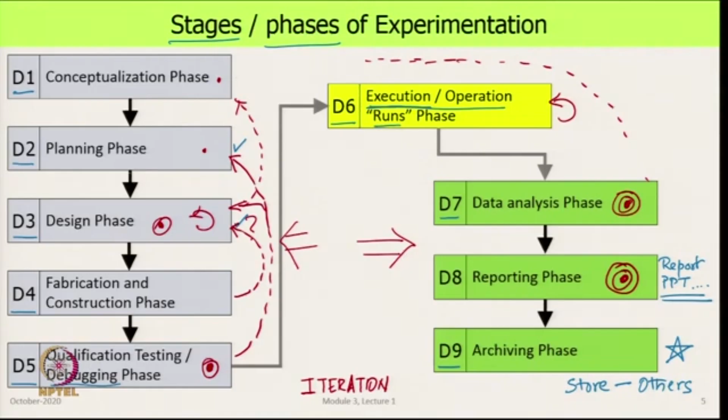So those were 2 examples of the process of experimentation. All of this takes a considerable amount of time for discussion. So in this lecture we will look at D1, D2, D3 phases, and then in the next lecture we will look at the rest of them.

We start with the conceptualization phase, and here what we essentially have done is that we sit in a team, have a lot of discussions, brainstorming, look at available information, ask the question: well, what is it that we are actually wanting? So we are posing the question, and this could take different forms.

It could end up being a question on a test of hypothesis, that is one. Or it could just be that I need some data, or we have some data and we want to check the goodness of that data, or we want to build up on that data. So that is checking of existing data, or we want to validate a design or a process, or maybe we had a theoretical design and now we want to do an experiment to validate how good that theoretical calculation was. These are some of the possible options, and you can add more to this as to what form the question or what we may call the objective may take.

We are not going too much into detailed numbers at this point, but asking very broad questions based on what is it that we want this for. Rather, we are asking, why am I doing this whole thing in the first place? That is the question.

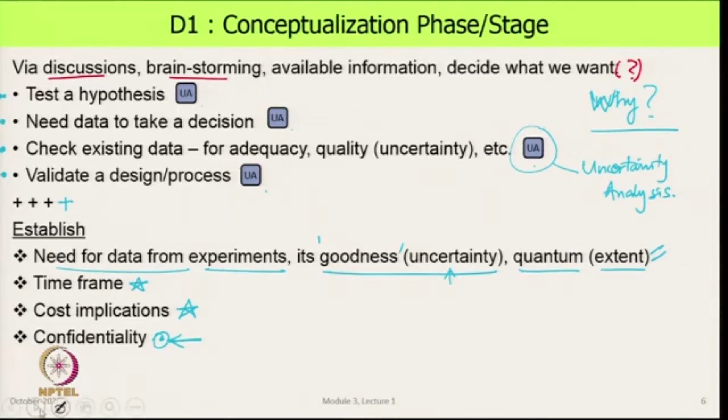That done, we come to the next phase, which is the D2 phase, the planning phase. And here is a diagram which captures some of the issues that I mentioned in those 2 examples. So we will go over this now.

We start at the top, where we say that I want to test a hypothesis, or draw conclusions, for which I need data, and I need to perform an experiment. So this is what came out of the D1 phase.

Now how do I proceed? We have 3 options here. We can either go to another laboratory or make the setup in our own laboratory, and we may have other constraints, whether we need a particular setup at all, or we can make any setup from a blue sky design.

So 2 things happen here. If you have to go to another laboratory, like in that first example, we have 2 possibilities: the answer could be yes or no. If yes, we ask can I use the setup as it is? If it's a standard setup as per the standard, we say yes, go ahead straight to debugging, make the test plan, send the sample, make the payment and execute. So we skip some of these stages.

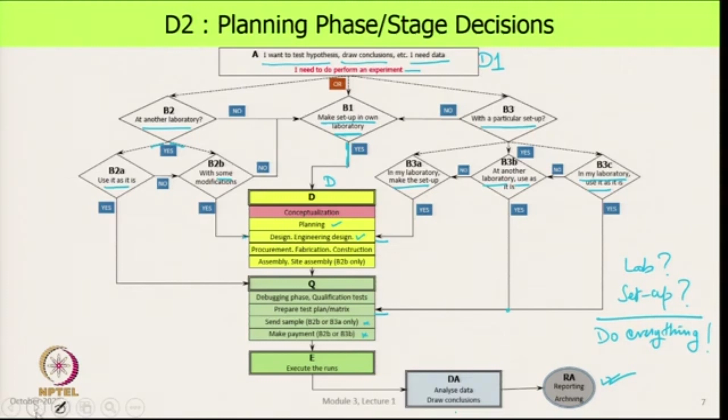And if we have to make it ourselves, then we come to the concept design part of the planning phase, which is basically like a typical design process.

By design, we mean industrial design in that sense, not designing by solving equations. So what we do is list the requirement criteria for the experiment, which is what data we need and its uncertainty.

And we ask: what are the concepts on which I can make this?

To give an example, we were looking at the issue of thermal conductivity of a material. There are many possible designs. One could be steady state, another transient, one could require a very thin sheet, another a thicker mat, one could be cylindrical, and different types of parameters could be measured in any of these experiments. So just thermal conductivity itself gives us lots of possibilities to actually get to the answer that we want.

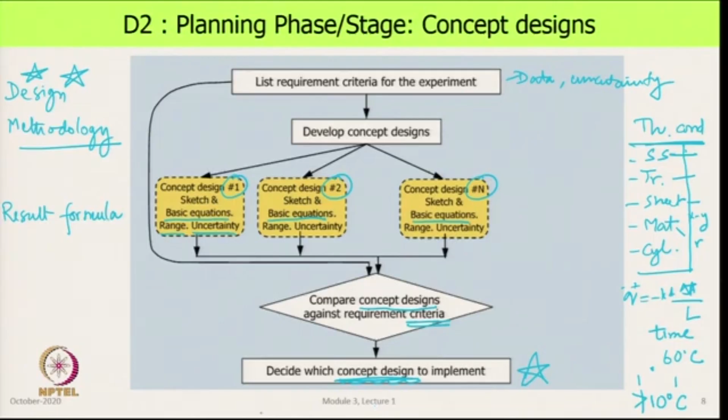So at the end of the planning phase, we have with us a physical basis of what to design - a concept design we have. This also gave us the physical basis, the result formula, and what measurements we will take in the experiment. It gave us some idea of the setup, apparatus and equipment, and some idea of the uncertainties we can expect. It also gives an idea of where we are going to set up the experiment.

That also we have decided in this phase - do we have the space? Which setup will we use if there is already something available, and how we are going to integrate it into the design? The need to design a setup also gets decided at this point, along with why and how to make it.

This means that we have to take a decision on hardware, both the non-electrical and electrical hardware, and also all the software requirements. So we get an idea that this is the thing I have to do. We are not sitting to solve it at this point, not writing any code or buying anything, but we are thinking through what all I have to do. That is what we are doing here. And in these cases, we have some idea of using uncertainty analysis.

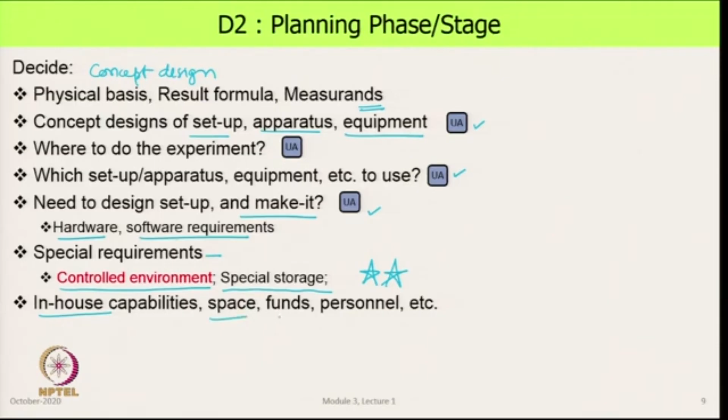At this stage, once we've done this, we also ask, what are my in-house capabilities? What can I do, what can others do for me? Space requirements, funds, people, all of that also got quantified. So it gave us a lot of clarity on how we are going to go forward and with what constraints.

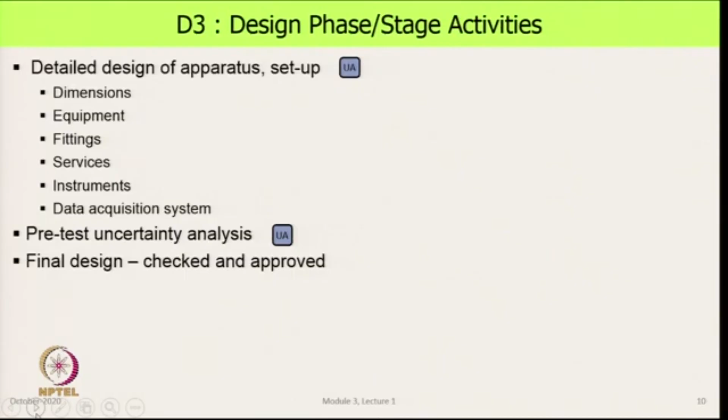That is the outcome of the D2 planning phase, which leads us into the detailed design phase, the design engineering phase. So in this sense, what was designed there is now detailed engineering design.

And now we are actually sitting with that formula equation that we had. We got a lot more knowledge about the practical part of it. We are going about designing everything, which includes its dimensions, what equipment we are going to have, what fittings, what services like compressed air or cooling water we may need, instruments that we will put, and what sort of data acquisition system we will have, and whatever else we need to do.

All of this, we could make a model, entirely possible, but by and large this is a paper pencil or a computer design. We have a lot of software where you can completely design it in full detail down to the last millimeter, see how they assemble, how they would disassemble, what can fit, what cannot fit, everything is done.

So it gives us all these things get decided, and we also do a very important thing, which is pre-test uncertainty analysis. We now have an idea of what instruments we are going to be using, what are the dimensions of various things, and the data acquisition information we have. We can use this with the result formula that is already there with us, and see what the uncertainty will be if we go ahead with this design.

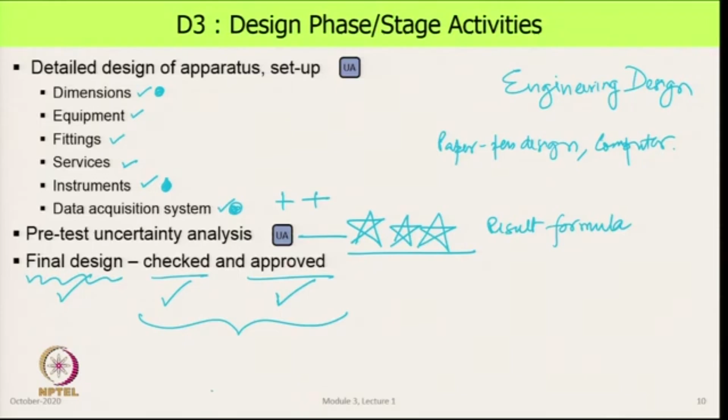If it is acceptable, we see, well, can I reduce the cost? If it is not acceptable, we say, what of these things can I change so that my expected uncertainty is within what I want. So that is quite a bit of effort, and after doing all of that, we have a final design which has been checked by somebody else and approved by somebody else. Professional engineering, this is always done, and it is a good practice, because someone who designed it, after a while the mind becomes a bit saturated, we can't catch our own mistakes. Somebody else looks at it, says everything is okay, says fine, go ahead, make it. Then we are doubly sure that the probability of making a big mistake or something going very seriously wrong is considerably minimized.

So these are the activities in the design phase. We do detailed engineering of the chosen concept design, pre-test uncertainty analysis, and once we do that, we come out with the output, which is we generate a test plan, which includes qualification and debugging tests, and how many times we will execute the experiment and with what parameters.

So this gets finalized. We come up with a detailed bill of materials, which includes items that we will just buy and assemble, this could be an instrument, or we could buy semi-finished material and make it. This could be like we got something, or we gave it to somebody else and said make this, or we have this thing and I will modify it slightly and give it to you, or we buy the raw material and completely make that part or system or subsystem from scratch. And the fourth thing is consumables.

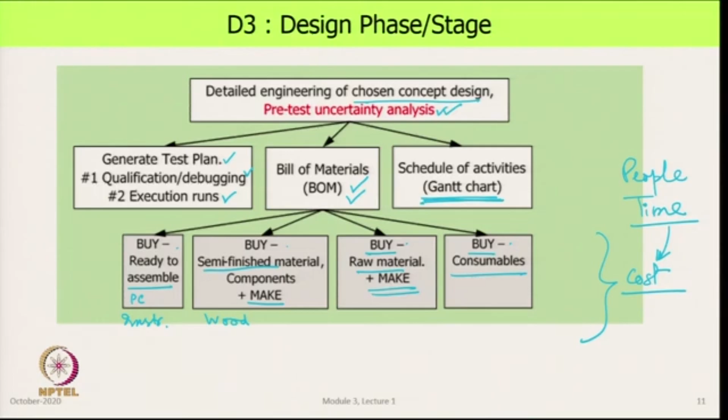So, the design phase gives us in much more detail, right down to the little nitty-gritty details of how this whole thing has to work out.

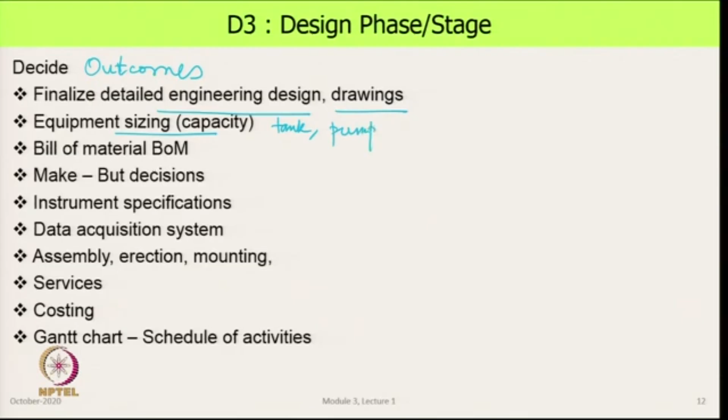So, the outcomes of the design phase, at the end of it, what do we decide? A detailed engineering design with all drawings. We have sized all the equipment, like if we had a tank in which we are going to store something, we have that. If we are going to use a pump, we know well what is the capacity of the pump or the blower that we want.

We have a complete bill of materials, from which we have also taken the decision of what I will make and what I will buy.

Instrument specifications, this is the heart of it, what is it that we are going to measure. The data acquisition system, again this is the heart of our experiment of data collection.

It also gives us a complete method for assembly, erection and mounting, how we will put everything together, what services we need in terms of electricity, power supply, air supply, all of that, the costing and the schedule of activities.

So, we are pretty much ready to go ahead and do it now. Until now, very little by way of any physical thing. This has only been a paper pen design, paper computer design. Now, we move to the physical world.

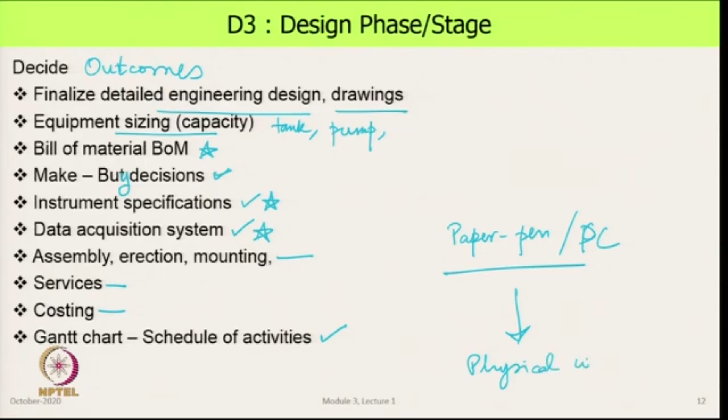Next, we will look at the fourth stage of experimentation, which is the fabrication and construction phase. At this point, we have the complete detailed engineering design ready. We have the bill of materials, we know what to buy, we know what to make, we know where we will do it, and now we go to the point of actually making it happen.

So, the activities of the fabrication and construction phase are: first is the purchase of raw material, fabricated parts, semi-finished parts, devices and ready to use parts. And this includes instruments.

Then we go ahead and decide what has to be made. So, some parts, some systems, and for some systems we get into the realization mode, which is manufacture and assemble different components together. This includes hardware assembly, including electronics, electrical connections, and connections to data acquisition systems and PCs.

The software for data collection requires a program to run it and control it. So, we have to develop the software requirement as to what it is supposed to do, and we come out with a system design document for the electronics. With these, we are ready to do the programming of the entire data acquisition system.

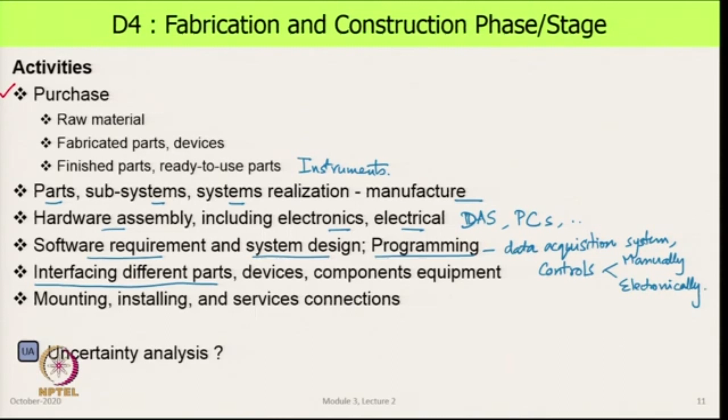The next, having got all the things together, the next big challenge is interfacing different parts, devices, and components together. The key word here is interfacing, where we have to make sure that a part which has come either as a bought out part which we are ready to use, or a part which we have made, or a part which is half and half of that, all of them have to harmoniously fit together and talk to each other. This calls for a lot of coordination.

And then comes the idea of mounting, installing, and making the service connections. The mounting includes where we will put it, whether it has a frame, whether it has a foundation, where it sits on the floor, what are the services that it requires.

Every setup will of course require electric power, of different types. We may need UPS power for something, 3-phase power for something else, water flowing requirement, or just a makeup water requirement. Flowing water will be required if something is cooled by water, and then it might need compressed air, or in many analytical type of work we will require various chemicals, including gases which are connected through a manifold.

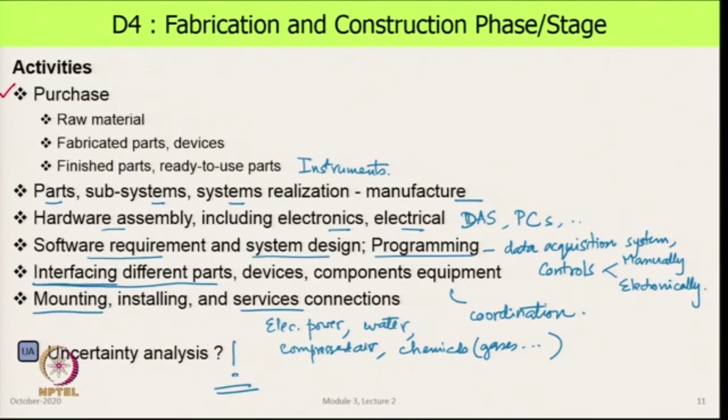Once we have done all of that, the outcome from this phase is a setup or an apparatus or a system, whichever way you like to call it, which is fully assembled and ready to be operated. So we can start it and make things happen.

We also have put it together, and in the process of putting together I have also realized how to assemble it. This will also tell us how to disassemble it, and this is important because if in the course of the experiment some part has to be changed or some part breaks, then we will have to make part or full disassembly, replace the part and then assemble it all again. So that is what we do.

So this requires a complete manual of how to do things. That means we have documented step by step how to put it together, how to take it apart, preferably with lots of drawings. And these days while we were assembling it, we could also make videos, so that gives the user an idea of how this original thing was actually put together.

We also put together instructions for startup and shutdown. So what is the sequence in which we start things? First, what do we do? Next, what do we do? Next, what do we do? And then we get it fully running, then how we take data, and then how we shut it down.

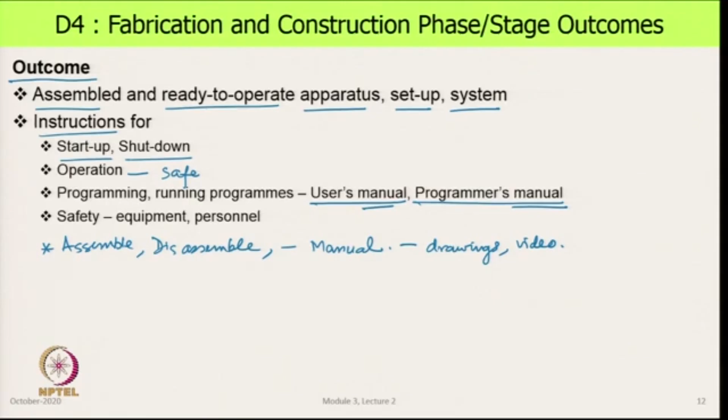So there are two manuals coming up. Depending on the complexity of the experiment, we could make a very extensive manual, or we could just make a sheet with itemized things to do, and that becomes our user's manual or programmer's manual.

And last but not the least, safety. Safety of the people, safety of the equipment, this is absolutely of topmost importance. Safety does not happen by chance, we have to think through it, we have to plan for it, so that it is as safe as possible, and still be able to foresee that if things go wrong, what should be our response.

So if there is a possibility of injury, we must have a first aid box, then fire safety, and in case of an emergency, we should know whom to call. So even if you know nothing about it, at least we can call, and the right people will come to your help. This is all very important. In the end, equipment may be destroyed, but human life is too precious, and we must protect it with all the things that we can do.

So this is the outcome of the fabrication and construction phase. We have an apparatus or equipment fully assembled with everything there. Now it is ready to operate.

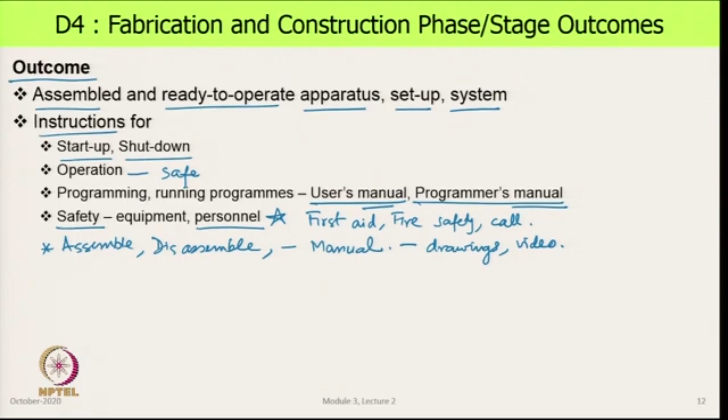On that note, we will conclude this lecture here and continue in the next lecture. In this lecture, we have had an overview of experimentation, where we looked at what are the different stages and phases of experimentation, how they go in a sequence, and how there is iteration between phases and within a phase.

Conceptualization phase, planning phase, design phase. So these were the phases that we have looked at in detail now. Four phases that we have, we have called these D1 conceptualization phase, planning D2, design D3, fabrication and construction D4. And in each phase we knew what we started with, what we ended with. We had very clear, distinct outcomes for each phase that we have. And in doing so, while we saw what was being done in each phase, we also saw the importance of uncertainty in those phases.

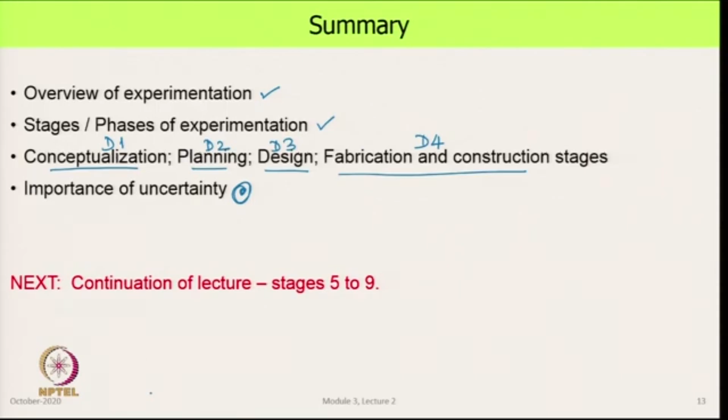So we will conclude this lecture here and continue with stages 5 to 9 in the next lecture. So that concludes our second lecture in the module on experimentation. Thank you.